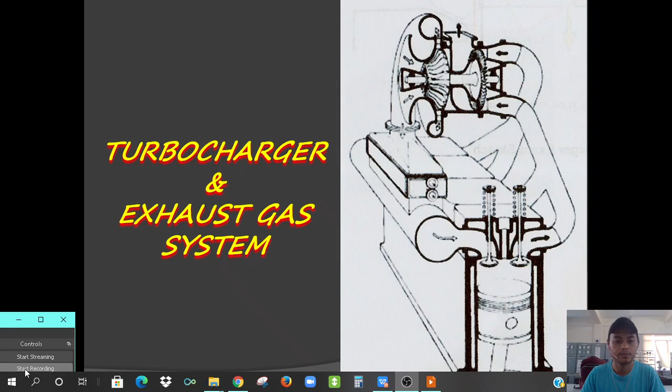Okay, good day. Today we will have a discussion about turbocharger and exhaust gas system. The turbocharger is used in giving the charge air inside the engine. We will discuss more about this, focusing on this device or equipment and why it is very important in our diesel engines.

So, turbocharger. By turbocharging an engine, the following advantages are obtained. First, what is the purpose of turbocharging? First is to increase the power of the engine.

Kung mas marami yung hangin na maipapasok natin doon sa loob ng combustion chamber, mas malakas din yung power na makikreate niya during combustion.

Number 2, to reduce the size of the engine and to fit into a limited space. Since mas marami na yung hangin na pwede mong ilagay, mas mataas na yung power, kaya pwede mo ring paliitin yung makina. For example, yung malaking engine na walang turbocharger ay 100 kilowatt yung kaya niyang power.

Pag may engine ka na with turbocharger, mas maliit na yung engine na iyon, may turbocharger lang para i-increase ang power, pero mas maliit yung engine mo, same lang yung wattage nung mas malaking engine na walang turbocharger. So pinaliit mo siya, nilagyan lang ng turbocharger, pero same lang yung kilowatt niya. Halimbawa, yung maliit na engine at yung malaking engine, same lang yung horsepower niya - parehas na 100 horsepower - pero mas maliit yung isa dahil may turbocharger, at mas malaki yung isa dahil walang turbocharger. So since may turbocharger ka na, kaya mo nang paliitin yung engine sa parehong power output na nakikreate niya.

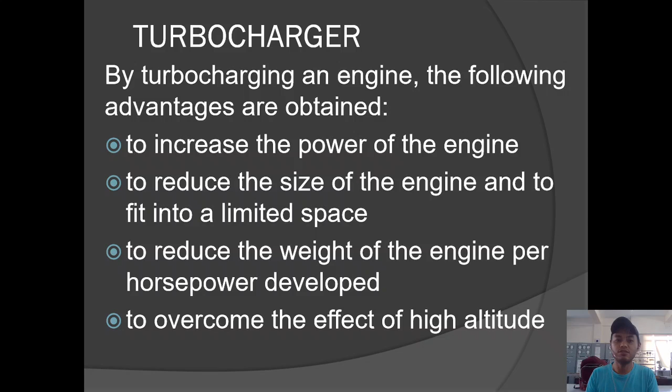Kaya pag nilagyan mo siya ng turbocharger, iyon na yung solusyon sa problema mo sa pagkulang ng hangin. Since ang turbocharger mismo, sa pag-ikot niya, siya na mismo yung hihigop ng hangin para maibigay niya yung tamang hangin na kailangan ng combustion. Iyon yung kagandahan ng pagkakaroon ng turbocharger.

Okay, balik tayo dito sa picture. So this is a turbocharger. Ito yung turbocharger natin. Lagyan natin ng sulat, arrow. Okay, highlighter pen na lang. Makikita natin dito.

For example, if you start the engine, dito magkakaroon ng combustion. Diba pag start ng engine, hindi pa tumatakbo yung turbocharger. Dito magkakaroon tayo ng combustion, then after the combustion - una pala, hihigop pa ng hangin. Hindi pa ito umiikot, pero makakahigop pa rin siya ng hangin. May makakapasok na hangin pa rin dito.

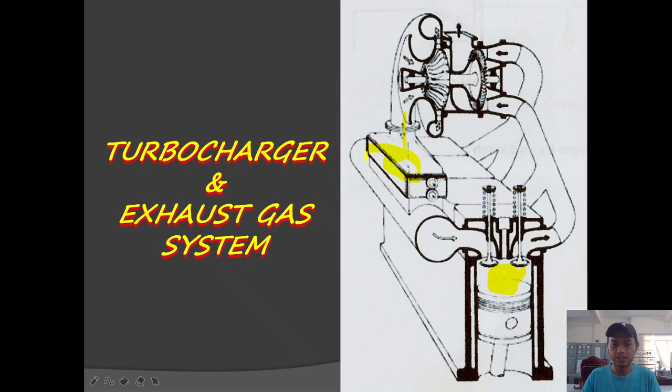May hangin dito, dadaan, papasok sa cooler, charge air cooler, and then dito sa charge air receiver, dito yung hangin. Pagbukas ng intake valve, papasok yung hangin dito. So pagpasok ng hangin dito: intake, then compression, then power.

During the power stroke, mag-inject ng fuel dito sa gitna, at magkakaroon tayo ng combustion o pagsabog, power stroke ang tawag doon. During the power stroke, nandiyan na yung apoy, itutulak yung piston pababa, and then pag-angat ulit ng piston ay ang exhaust stroke.

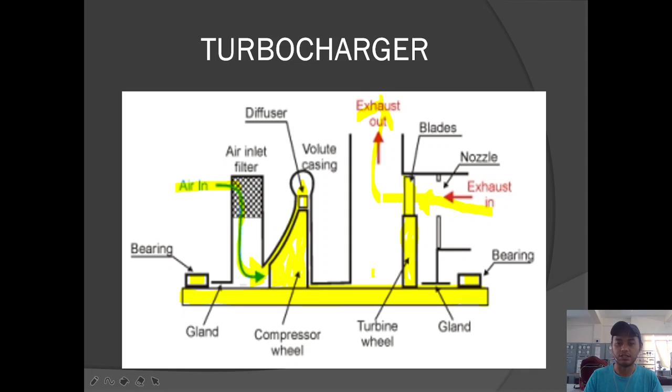So, the turbocharger consists of a single-stage impulse turbine connected to a centrifugal impeller by a shaft. The turbine is driven by the engine exhaust gas which enters via the gas inlet casing. The gas expands through a nozzle ring where the pressure energy of the gas is converted.

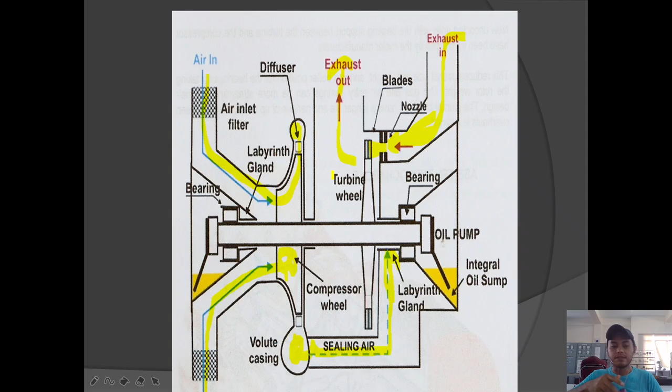So, these are different pictures, but all the same lang yung sinasabi ko. Okay, wait lang. Okay. Ito yung anak ko. Okay, so

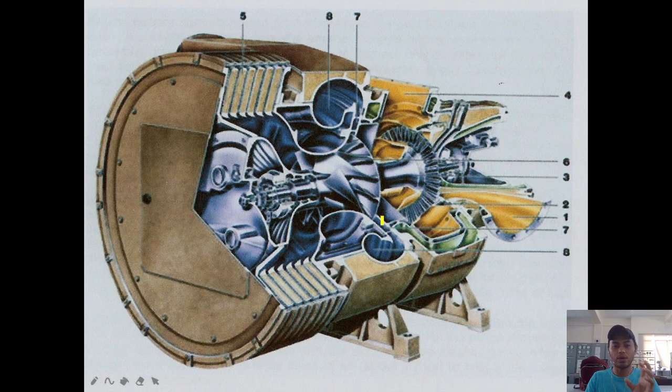Okay, this is the nozzle ring. So, the nozzle ring is where the energy in the exhaust gas is converted into kinetic energy. It is fabricated from a creep-resistant chromium-nickel alloy, heat-resisting molychrome nickel steel, or a Nimonic alloy which will withstand the high temperatures and be resistant to corrosion.

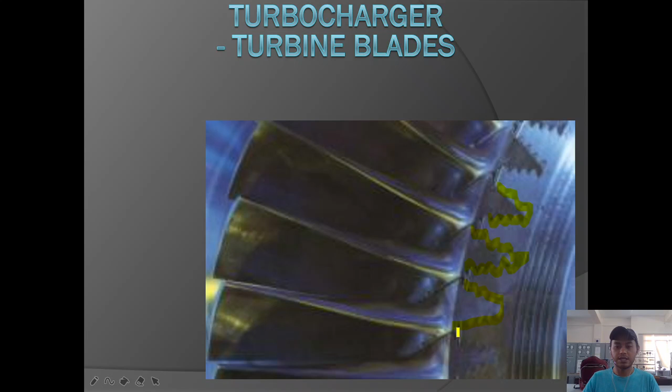Okay, turbine blades are usually a nickel chrome alloy or a Nimonic material which has good resistance to creep, fatigue, and corrosion. Manufactured using the investment casting process, blade roots are of fir tree shape which give positive fixing and a minimum stress concentration at the conjunction of root and blade. The root is usually a slack fit to allow for differential expansion of the rotor and blade and to assist

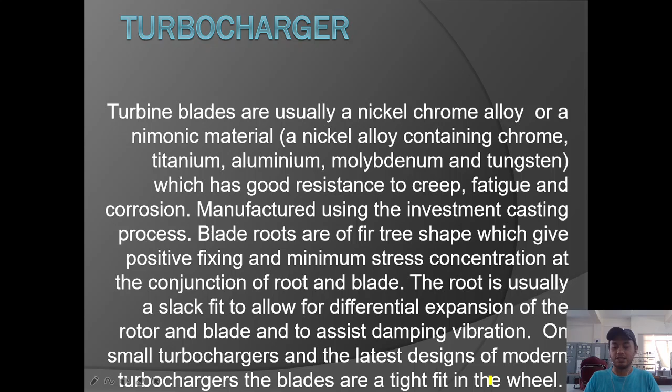Okay, so this is the turbine blade. Some turbine blades also have a lacing wire. So, lacing wire is used to dampen the vibration, which can be a problem. The wire passes through holes in the blades and damps the vibration due to friction between the wire and blade. It is not fixed to each individual blade.

The wire can pass through all the blades, crimped between individual blades to keep it located, or it can be fitted in shorter sections, fixed at one end, joining groups of about 6 blades. So a problem with lacing wire is that it can be damaged by foreign material.

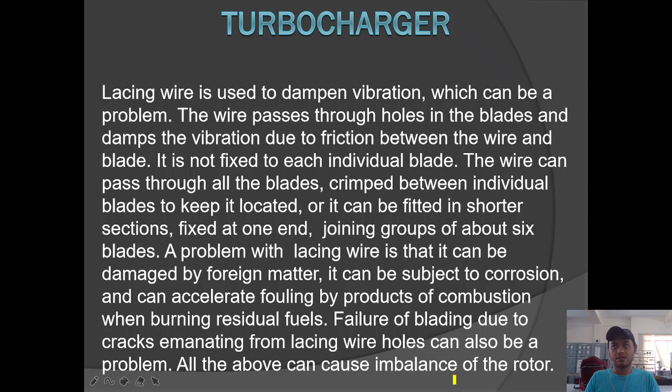Okay, next, the compressor impeller. There's no picture here. So the compressor impeller, on the compressor side, the air side, is of aluminum alloy or the more expensive titanium. Manufactured from a single casting, it is located on the rotor shaft by splines.

Aluminum impellers have a limited life due to creep, which is dictated by the final air temperature. Often, the temperature of air leaving the impeller can be as high as 200 degrees Celsius. The life of the impeller under these circumstances may be limited to about 70,000 hours only. So, to extend the life, air temperature must be reduced.

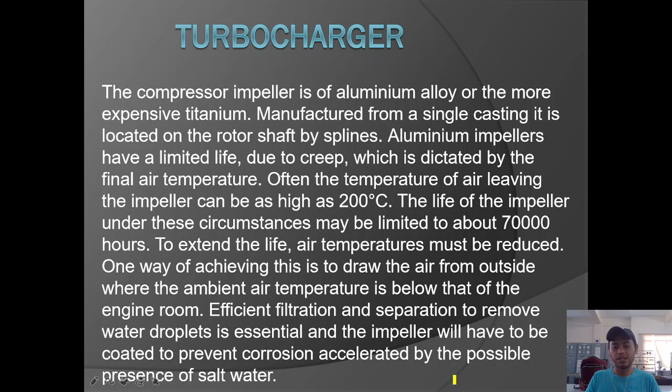Okay, the casing. The air casing is also of aluminum alloy and is in two parts. The turbine casing is of cast iron. Some casings are water-cooled, which complicates the casting. Water-cooled casings are necessary for turbochargers with ball and roller bearings with their own integral lube oil supply to keep the lube oil cool. Modern turbochargers with externally lubricated journal bearings have uncooled casings.

This leads to greater overall efficiency as less heat energy is rejected to cooling water and is available for the exhaust gas boiler. So, our exhaust that passes through the turbocharger is still hot afterwards, right?

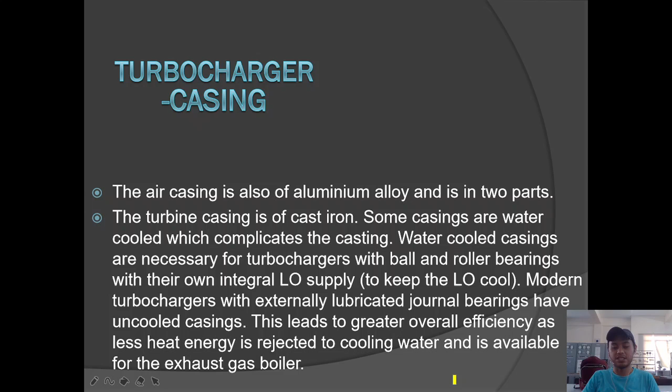Okay. Bearings. So, let's go with bearings. Bearings are either of the ball or roller type or plain white metal journals. The ball and roller bearings are mounted in resilient mountings incorporating spring damping to prevent damage due to vibration. These bearings have their own integral oil pumps and oil supply and have a limited life of 8,000 hours.

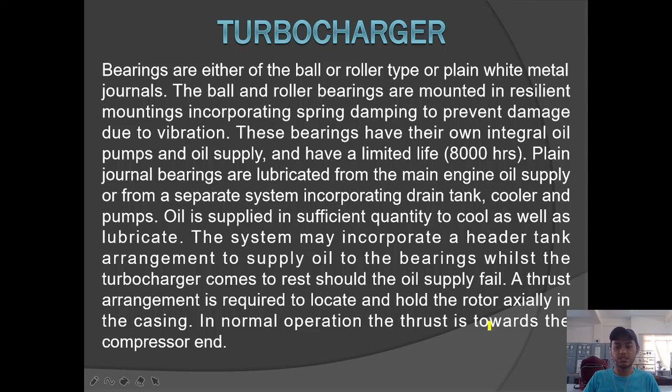Plain journal bearings are lubricated from the main engine oil supply or from a separate system incorporating drain tank, cooler, and pumps. So, yan yung bearings. So it is, meron siyang sariling supply of oil, and then a thrust arrangement is required to locate and hold the rotor axially in the casing. In normal operation, the thrust is towards the compressor end. Okay. Bearing. So limited life of 8,000 hours.

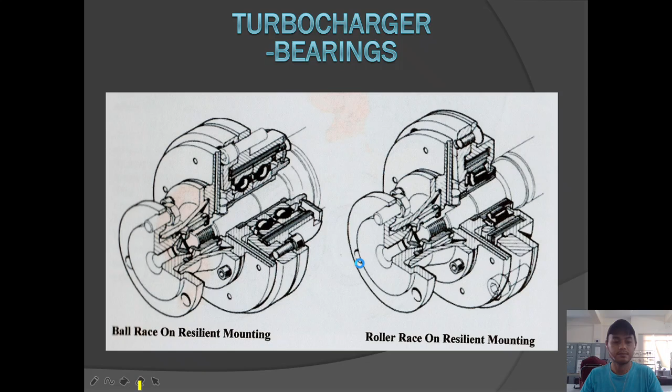Ay, pangit ng drawing. Baka mapagkamalan pa yan. Okay, erase all. So roller. Next. Oops, loading. Okay.

So, a vent to atmosphere at the end of the labyrinth gives a guide to the efficiency of the turbine end gland. Discoloring of the oil on the rotor fitted with a roller bearing will also indicate a failure in the turbine end gland. So a labyrinth arrangement is also fitted to the back of the compressor impeller to restrict the leakage of air to the gas side. So bawal yung hangin na sa compressor side pumasok doon sa exhaust side.

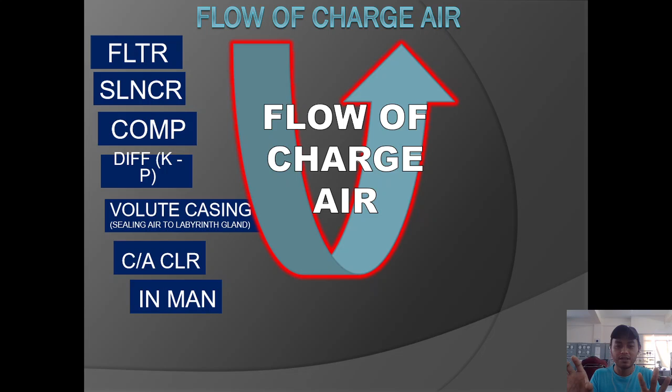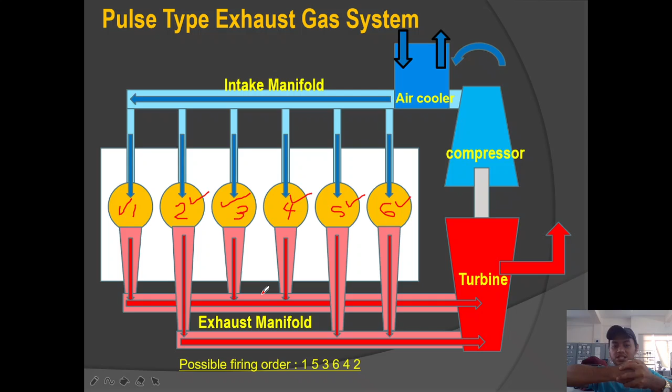Pagkatapos, mag-fire agad ulit siya sa number 3, dito sa left side. And then mag-fire siya sa number 6 sa right side. And then sa 4, o kailangan palitan to, dapat sa 2, di ba? Mas maganda sa 2 siguro, bago sa 4. Pero since yung number 4 nasa bandang gitna naman, so pwede siyang magkabaylo, magkapalitan. Okay, so ganun yung firing order dapat ng engine, magkabilaan yung pagkasunod-sunod ng fire para ma-prevent natin yung ating crankshaft na baka mag-twist or mag-break or ma-bend, di ba? Okay, so that is the firing order.

And then makita din natin dito sa ating exhaust manifold, yung dalawang exhaust manifold magkakaiba din. So number 1, dito una siya magbibigay ng exhaust, dito muna sa unang exhaust manifold. So itutulak niya yung turbine, ganun paikot. And pangalawa, yung number 5 for example, dito naman sa pangalawang exhaust manifold magbibigay ng exhaust.

So tulak na naman sa turbine. So mas manipis yung ating exhaust manifold dito sa pulse type kaysa dun sa constant pressure. Dito naman tulak. And then sa next na firing is number 3, dito naman siya tulak sa unang exhaust manifold. And then sa 6, dito sa pangalawa. So papalipat-lipat yung pressure na natatanggap ng ating turbine. So dalawang exhaust manifold, and parang ang tawag doon, parang pinapaikot mo yung turbine ng papulso-pulso or paunti-unti, di ba? So tulak dito, so maganda yung ikot niya ng turbine.

So bakit merong ganito? Saan ginagamit tong pulse type? Saan ginagamit tong constant pressure? So constant pressure, since malaki yung exhaust manifold niyan, nandyan papasok yung lahat ng exhaust. Ito ginagamit sa mga makina na, this is used during start-up ng makina. Kailangan mapaikot mo yung turbocharger para magkaroon ka ng magandang pressure dito ng hangin, di ba? So sa start ng makina wala pang exhaust na nagagawa o na nake-create, di ba? So kung wala pang exhaust na nake-create, hindi pa umiikot tong compressor mo.

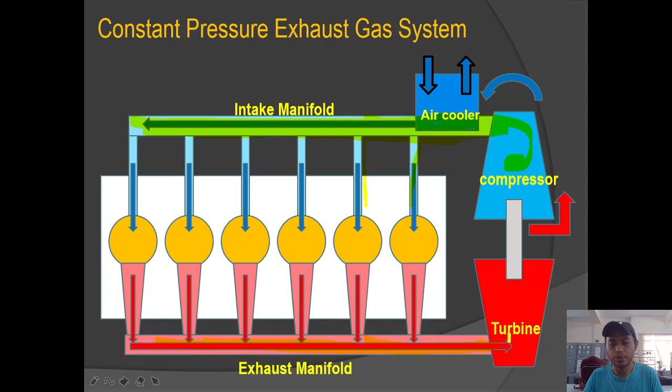Whereas sa pulse type exhaust gas system, ginawa ito para sa mga engine na kailangan, pag start mo pa lang ng makina, mabilis mo mapapaikot yung turbocharger mo. Kasi pulse, parang maliit itong manifold na to, pre-pressurized mo na agad, nilagyan mo na agad ng pulse para mapaikot mo na agad yung turbine. Di tulad nitong constant pressure, since malaki yung exhaust manifold na yan, pupunuin mo muna yung exhaust manifold niyan bago makapag-create ng pressure sa turbine para mapaikot niya yung turbocharger na.

Okay, so balik tayo sa pulse type. Pulse type exhaust gas system is usually used on a 4-stroke engine. Sa 4-stroke engine kasi meron siyang tinatawag na turning gear. Yung turning gear na yun, lagyan mo lang yun ng hangin, iikot na yun. Pag umikot yung turning gear na yun, nakakouple yun sa ating flywheel ng makina. So pag ikot ng turning gear, iikot din yung flywheel. So pag ikot ng flywheel, magkakaroon agad dito ng suction kasi iikot ditong yung piston, bababa na, maghigop na ng hangin.

And then after that mabilis lang makapag-create ng exhaust. Kahit maliit lang yung exhaust na nakikreate mo, since pulse type siya, maliit yung tubo dito o yung manifold na yan, makakapagbigay agad siya ng pressurized na exhaust sa ating turbine. So mapapaikot niya agad yung turbocharger. Yan yung advantage ng pulse type kaysa sa constant. Ang kagandahan din ng constant is constant yung pressure na natatanggap ng ating turbocharger, hindi nagpa-fluctuate yung kanyang pressure o yung natatanggap niyang exhaust. Dito nagpa-fluctuate, pero mas mabilis mo siyang mapapaikot yung turbocharger mo. So that is the difference.

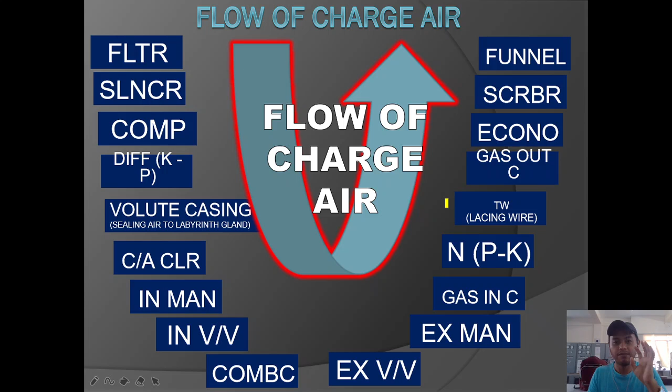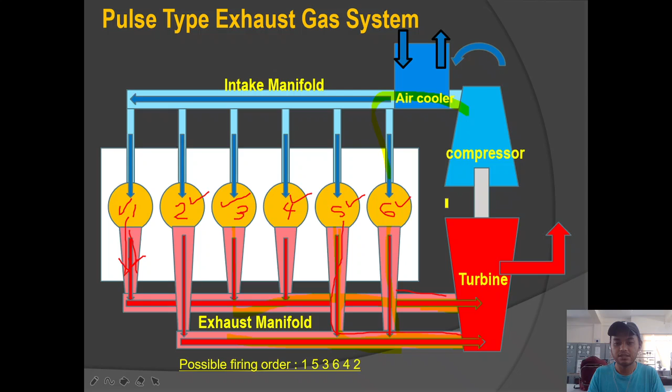Okay, so balikan ko, this is the most important part of our discussion, the flow of charge air. Mas simplified na to. And then the two types of exhaust gas system, I hope na naintindihan nyo. So that's it, so thank you very much for your time. God bless, and see you on our next topic.